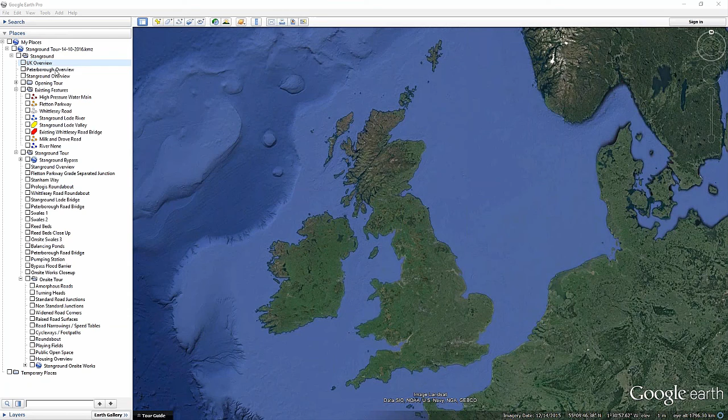So in this case study, we'll look at a new development on the southern edge of Peterborough. The city of Peterborough, with its historic cathedral at its centre, is situated roughly 75 miles north of London and benefits greatly from its direct transport links, the A1M motorway, the East Coast Main Line Railway, and the River Nene that runs through its centre. It may come as no surprise that it's an ever-expanding city.

So, as part of a major extension to the southern edge of Peterborough, south of Stanground, Wormald Burrows Partnership Ltd were engaged to undertake the civil engineering design for a proposed residential development of around 2,000 dwellings with new retail centre and public recreation ground. A major requirement of this extension was the provision of a new 3.2 kilometre bypass to link the south-eastern corner of Peterborough to the Fletton Parkway, a dual carriageway major distributor road that runs from Peterborough to the A1M.

This bypass was to have a dual purpose. Firstly, to create a transport link to reduce congestion on existing roads within the surrounding residential areas of South Peterborough and Stanground, and secondly, to provide an entrance to the new development.

So in this presentation, we shall talk about the following design challenges. Finding a route for the new bypass, taking into account the many site constraints, a new connection onto the Fletton Parkway, dualling the Stanham Way feeder road, the upgrade of the roundabout on the western end of the bypass, a new roundabout on Whittlesey Road at the eastern end of the bypass, the bridge over the Stanground Lode, an Environment Agency watercourse, and the bridge over the new bypass, an innovative SuDS drainage scheme with balancing ponds and reed beds, and the challenges within the housing development itself.

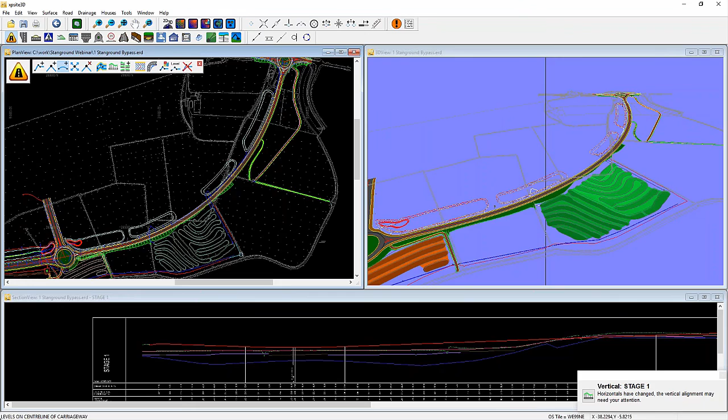Another engineering constraint was that the local water authority had recently laid a high-pressure water main running west to east across the site, which incidentally was not installed on its agreed alignment, the position of which was now very close to the southern edge of Wormald Burrows' preferred bypass route. Ideally, the bypass would be aligned close to the high-pressure water main to maximise the area of the site for the SuDS infrastructure, Peterborough Road Bridge, dwellings and employment development, but not so close as to jeopardise the integrity of the water main. Jeff, a few metres either way made all the difference?

Indeed, you can see here in XP Site 3D, we modelled the bypass route with interfacing, that is together with cuttings and embankments, to show the extents of where the bypass would have to be dug in so as to pass underneath the existing Peterborough Road, which was to bridge over the bypass.

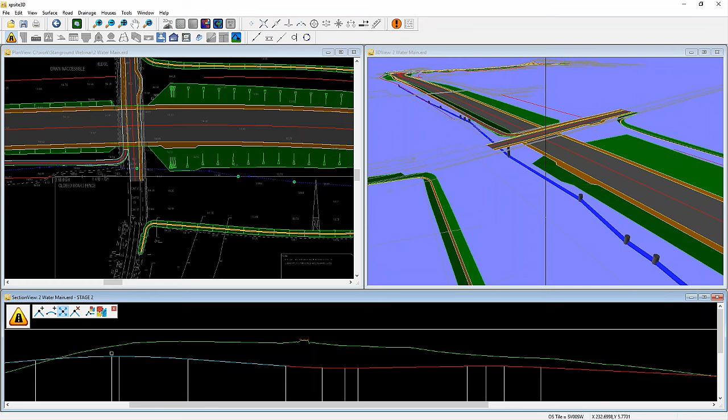Because the interfacing slopes are instantly updated with every adjustment of the road alignment, the proposed model could be visually checked against the surveyed position of the water main and adjusted to ensure there was sufficient clearance in the horizontal and vertical planes to leave the water main and thrust blocks undisturbed. This was an iterative design stage, but the speed and flexibility of XP Site 3D enabled this work to be completed very quickly.

The new bypass would link between the Fletton Parkway, a dual carriageway distributor road serving the south of Peterborough, to the existing Whittlesey Road on the opposite eastern side of the site. The bypass was envisaged to reduce the existing heavy traffic flows through Stanground. However, the existing grade-separated junction onto the Fletton Parkway would need extensive alterations, as it had not been designed to accommodate the increased level of traffic. Jeff, can you tell us how you achieved that?

Yes, indeed. The existing junction on the Fletton Parkway was of typical design and consisted of 4 slip roads peeling on and off the dual carriageway, connecting to the dumbbell twin roundabouts, one either side of the dual carriageway, with a single 2-way road passing beneath the dual carriageway and joining the 2 roundabouts.

Any modifications to this junction would be limited by the bridge, as it would be prohibitively expensive to alter the abutments. A second major limit was the path of the slip roads, these being constrained by the industrial estate buildings to the southwest and northwest, a pedestrian underpass on the western side, a large lake to the northeast, and the Stanground Lode Valley to the southeast.

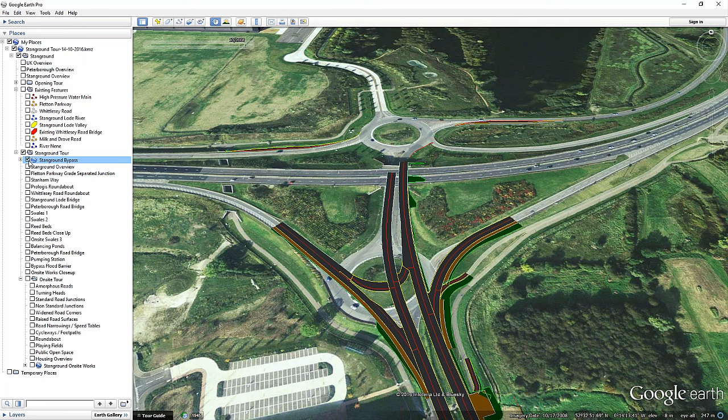To allow for increased traffic, which we wide area modelled from traffic counts, O&D surveys, and movement surveys of residents living on the existing development immediately to the north, our solution was to remove the existing southern roundabout, replacing it with dual carriageway, with signal-controlled junctions for the slip roads onto the Fletton Parkway. The principles employed in the design of the new junction layout were to replace points of conflict with merging movements, and thus substantially increase the capacity of the junction within the existing grade-separated structure.

The new dual carriageway linked through to another pre-existing roundabout 400 metres to the south. So as to reduce construction costs, the existing single carriageway, Stanham Way, was retained as the western side of the new dual carriageway southern link.

Modelling the eastern carriageway in XP Site 3D allowed us to minimise the extent to which this new link would encroach on the Stanground Lode Watercourse Valley and designated Newt and Reptile Reserve along its east flank, by careful attention to various interfacing options in the vicinity of the lode.

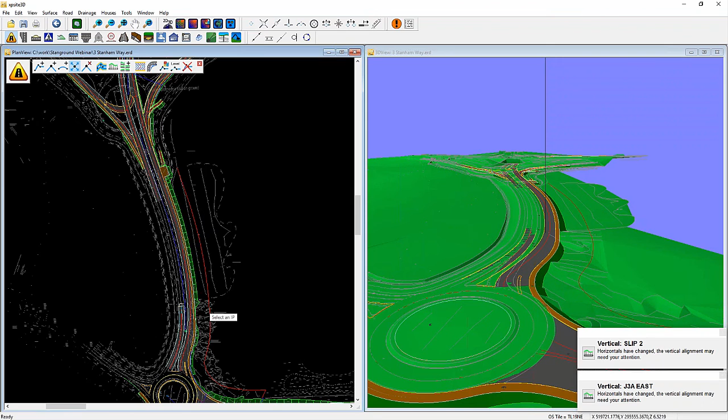As you can see here on the XP Site 3D model, as I move the horizontal alignment, everything on the design that is affected by the change is instantly regenerated to show the impact. The pre-existing roundabout at the southern end of this link, which served an existing industrial estate, would be where the western end of the new bypass would be joining.

The introduction of the bypass connection onto this existing roundabout junction would result in a very significant increase in traffic, and so the roundabout required extensive remodelling. Yes, we remodelled this roundabout in XP Site 3D to increase the capacity of the junction, as well as introducing dedicated lanes for existing traffic to travel to the expanding industrial estate and new traffic to peel off down the new bypass, without either flow impeding the other.

Provision was also factored into the design for a possible future Southern Link Road connection from this roundabout. Very severe constraints were imposed on the roundabout design by the presence of the Stanground Lode Valley, which contains an Environment Agency main river, great crested newts and reptiles, and various depths of peat. Once again, XP Site 3D really came into its own, as all changes to the interfacing, brought about by adjustments to the horizontal and vertical alignments of the roundabout and connecting carriageways, could be instantly viewed in true 3D.

The western end of the proposed bypass was connected to the existing roundabout using XP Site 3D's automated junction tools. We defined the existing edge of the roundabout from the 3D survey, then matched the western end of the new bypass to it. This process took only a matter of seconds to undertake in XP Site 3D, but would have taken far longer using traditional tools. XP Site 3D automatically defined the horizontal and vertical positions of every channel and curb line to smoothly transition from the bypass to the existing roundabout.

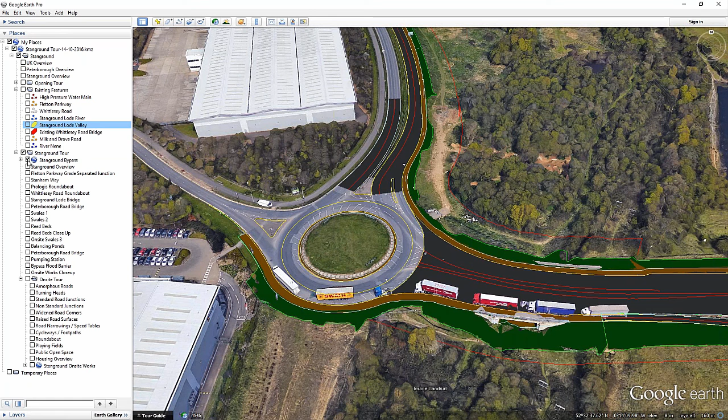And the other end of the new bypass, the eastern end, was to be connected to a roundabout junction onto Whittlesey Road. Wormald Burrows had a choice: to pull the route of the bypass slightly further north and connect to an existing roundabout, or break into an existing road with a new roundabout. Following detailed traffic analysis, the existing roundabout was deemed too small to cope with the increase in traffic flows and would have required extensive remodelling. It would also have meant the new bypass route would encroach into residential development land, effectively sterilising a significant area of the site.

Constructing a completely new roundabout in a more desirable location was the only viable solution, but would incur greater costs, which could be minimised by reducing the area of breakout on the existing road. Modelling a roundabout in XP Site 3D is very quick, and this speed allowed us to test multiple horizontal and vertical positions for the new roundabout in order to reduce the amount of work required on site, while still avoiding the many site constraints, principally the existing bridge, Milk and Water Drove Road, and the old course of the River Nene.

Once the horizontal position was chosen, using the 3D view in combination with the vertical road alignments allowed us to tweak the levels of the three incoming roads to the roundabout, two being the east and west arms of Whittlesey Road, and the one being the new bypass. As you can see here in XP Site 3D, the 3D view shows the existing survey surface at the same time as the proposed road surface.

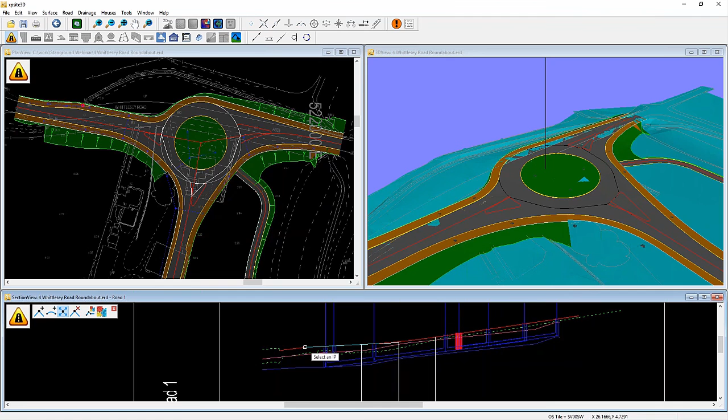The ability to immediately generate a roundabout design in full 3D that complies with all design standards, with even gully positions located correctly in accordance with the British standards and the DfT Roads and Bridges standards, underscores the step change between XP Site 3D and competing software. The difference is twofold. XP Site 3D has been designed from the outset such that every construction entity understands its relationship to other entities, which is the essence of BIM, Building Information Modelling.

And secondly, XP Site 3D has decades of design engineer intelligence built into the design processes. The result is a design that would previously take a day or two to complete can now be undertaken in seconds, in real time, with design standards met.

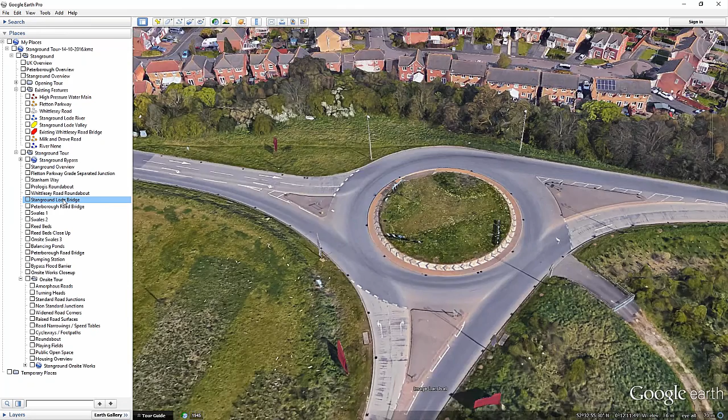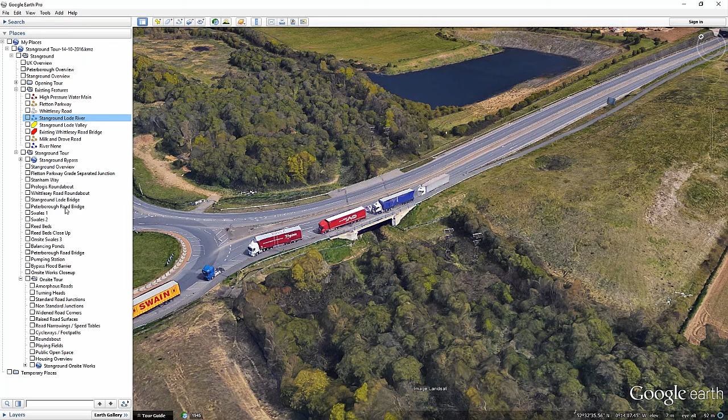So two new bridge structures were required. The first to enable the bypass to cross over the Stanground Lode watercourse, where the Environment Agency stipulated that animal movement should be accommodated throughout the length of the Stanground Lode. This necessitated the inclusion of a berm and greater dimension between abutments to provide free passage at top of bank, and a second bridge to allow the proposed bypass to pass beneath the existing Peterborough Road.

XP Site 3D was used to design the carriageway over the Stanground Lode bridge, and from this design a general arrangement drawing was prepared and passed to the structural engineers for the structural detail. Similarly, a new bridge was required where the bypass crossed beneath Peterborough Road, where the same process was repeated, with the bridge structure being modelled in part using XP Site 3D. The interfacing tool was used to outline the bridge structure and void beneath in 3 dimensions.

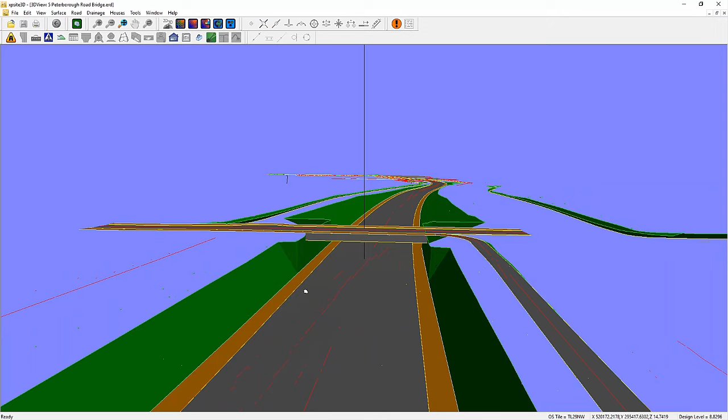One great advantage of XP Site 3D is its ability to model in true 3 dimensions, where one road, in this case Peterborough Road, crosses over another, that is, the bypass, allowing the engineer to accurately create vertical alignments for both roads whilst maintaining the required vertical gap between the two.

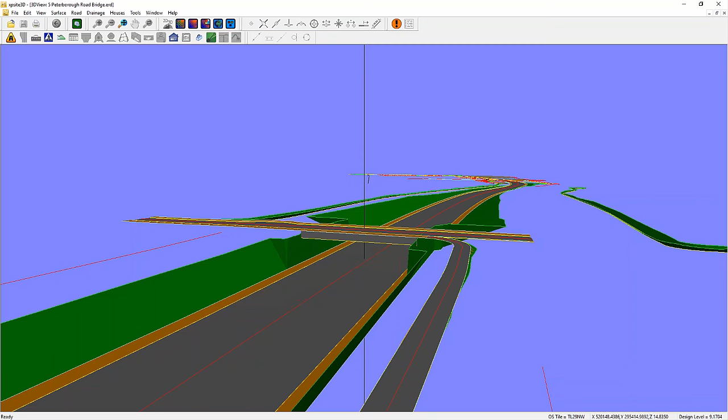It was also at this point that the bridge severed two large diameter foul trunk sewers that drained the settlements to the south of Peterborough. Modelling of the foul water drainage solution was undertaken in MicroDrainage using the direct link between XP Site 3D and MicroDrainage. The Drainage Authority, the Middle Level Commissioners, stipulated that the on-site stormwater drainage scheme at Stanground maintained high standards in water quality and efficiency.

As the old River Nene was pumped, the Middle Level Commissioners required a £56,000 surcharge per impermeable hectare of development, which for 40 impermeable hectares of development amounted to £2.24 million. It was agreed with the Middle Level Commissioners that if a scheme could be designed to at least replicate, if not improve upon, the runoff regime of the agricultural land, that the £2.24 million surcharge would be waived, but that the design had to fulfil criteria for stormwater outflow to replicate the greenfield runoff in terms of time of concentration, quantity and quality.

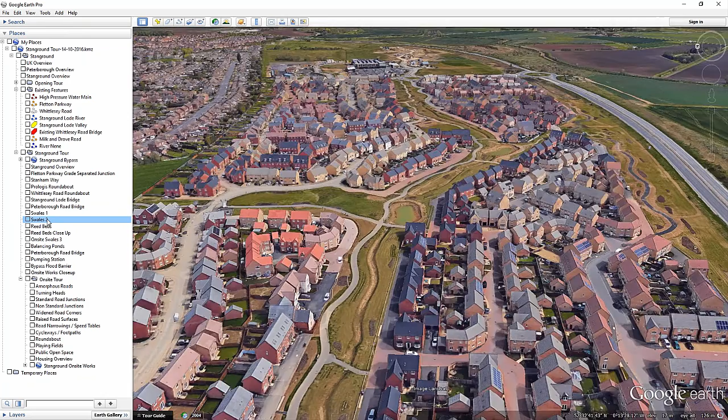To achieve this, Wormald Burrows Partnership devised an innovative SUDS scheme, making use of the grassy public open spaces between the houses and the noise abatement land strip alongside the new bypass, whilst simultaneously improving the aesthetics of the residential development. Jeff, could you describe how Wormald Burrows achieved this?

Well, as part of an agreement with the Water Authority, we had to ensure the stormwater runoff from both the residential development and the bypass had to pass a certain quality standard. To reach this standard, the water would have to pass through some sort of water treatment system to remove pollutants and impurities, to ensure that it would be safe before discharging into the river network.

It was imperative that a low-velocity attenuated flow was fed through the reed beds to ensure efficient filtration before the water outflows to the River Nene, and this was achieved by using a series of ponds located between the bypass and the development. We designed the reed beds in XP Site 3D by modelling a series of shallow, fairly wide earthworks aligned along the existing ground contours with raised ground in between to enable future maintenance, and this produced a combined flow distance of about 1 kilometre within a relatively small area of land.

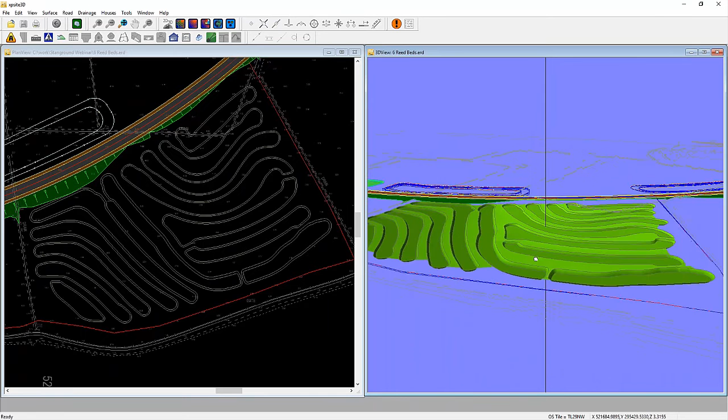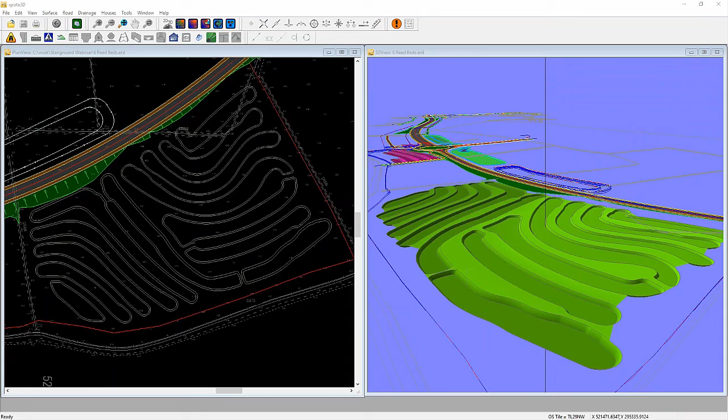The replacement of sterile agricultural land with reed beds provides significant environmental and wildlife habitat benefits. An additional aesthetic benefit by designing the reed beds aligned to the existing ground contours is that when viewed from eye level, it appears as a single large bed of reeds, which adds to the visual appeal when travelling along the bypass and at the entrance to the new development.

And the on-site swale networks between the new housing have been designed to not only attenuate the flow, but also to act as a water treatment system, whilst the water has been directed away from the properties towards the balancing ponds.

These balancing ponds then attenuate the flow by limiting the outflow to the reed beds, and hence to the River Nene, and providing sufficient storage for the critical storm.

We used XP Site 3D to design the swales and piped stormwater system into the 3D model, which could then be easily exported into MicroDrainage to run the drainage simulations. The results from the MicroDrainage simulations were then fed back and used to determine the critical storm event, which then informed the engineer the volume of storage that would be required in each of the balancing ponds.

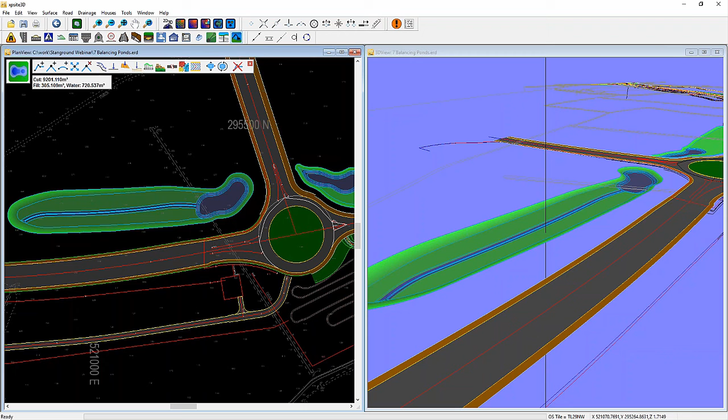There was a further benefit arising from the method of treatment of the stormwater discharge. Under the Code for Sustainable Homes in force at the time, the Stanground development gained extra credits as it fulfilled the criteria which specified that a typical 5mm rainfall event would provide no additional flow off-site. The long swales and balancing ponds throughout the residential development, in combination with the reed beds, allows the 5mm storm event to soak away, be absorbed, and naturally evaporate, and so never actually reach the River Nene outflows.

As mentioned earlier, construction of the bridge that carries Peterborough Road over the bypass caused 2 foul trunk sewers to be severed. Because of foul water surcharge problems downstream, it was necessary to introduce buffer storage. Additionally, the Water Authority required that each of the trunk foul sewers downstream of the bridge should take similar flows as were being delivered before they were severed. How did you address this challenge, Jeff?

Well, there was a proposal by another consultant that the only means of meeting those criteria was by constructing 3 pumping stations, 1 for each of the trunk sewers and 1 for the foul water drainage arising from the new development. Each of the pumping stations was to have consisted of 3 chambers, each of 4 meters diameter and 8 meters deep, in order to provide buffer storage, constructed within well over 12 meters depth of peat in that particular area. For obvious reasons, that consultant was having great problems in convincing the Water Authority that the scheme was viable and that the Water Authority should adopt the 3 pumping stations when completed.

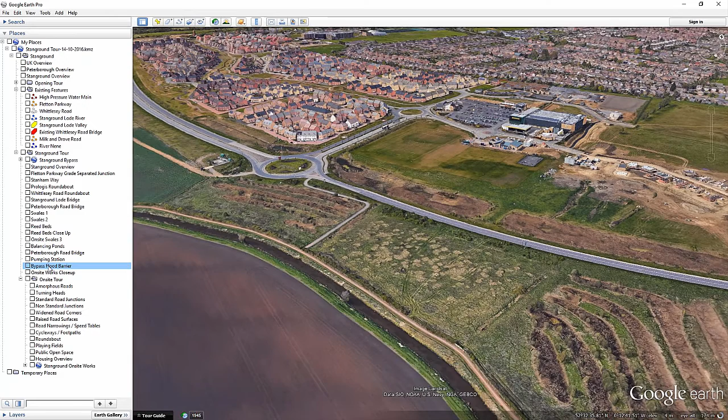Modifying the vertical alignment of the road is very quick in XP Site 3D and automatically recalculates any and all features that are dependent upon it. The real-time adjustment of horizontal and vertical alignments is a powerful tool for the design engineer. It saves time and removes the possibility of human error.

The interfacing and contouring remain up to date and instantly show when the design has achieved the desired level to avoid on-site flooding. Thus, under any flood conditions, the on-site flood routing ensured that, if the drainage systems were overwhelmed, all properties would remain above flood water flows.

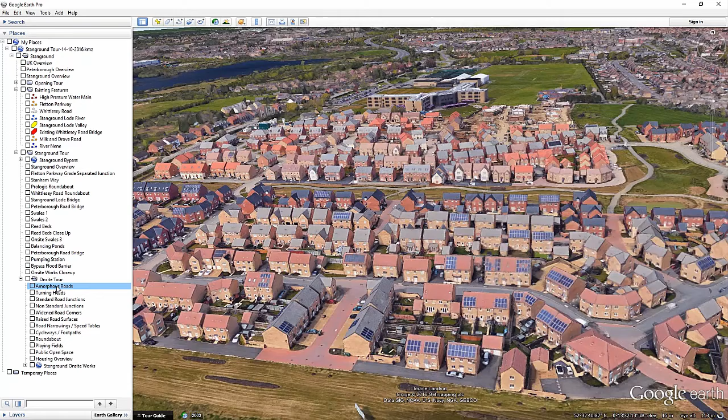Let's take a look at the residential development of the site. A quick review of the on-site design shows the numerous quirks and challenges of the architect's road layout, all of which have presented no problem for the engineers to design speedily and accurately using XP Site 3D. Here we can see amorphous shaped roads where the left and right channels are anything but parallel or straight, turning heads of various individual designs,

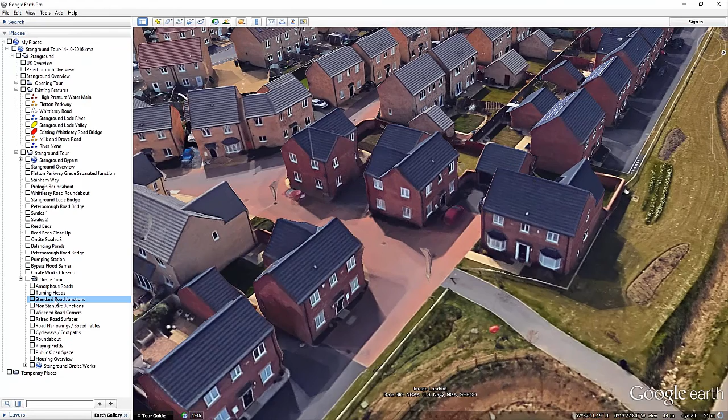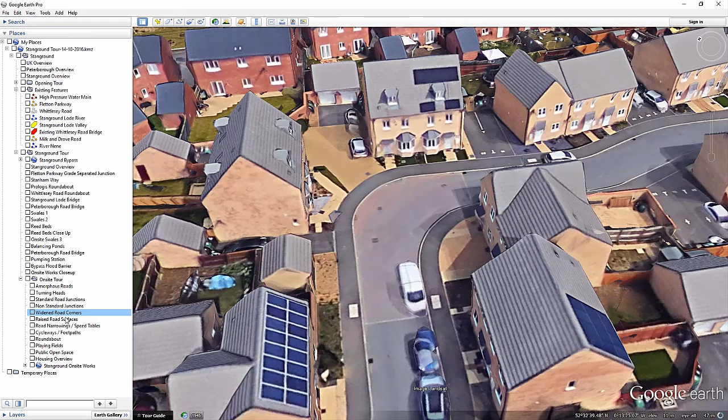numerous standard road junctions, non-standard road junctions of various shapes, widened road bends to allow larger vehicles to negotiate the bend, raised road surfaces to provide a shared surface for vehicles and pedestrians, road narrowings for traffic calming,

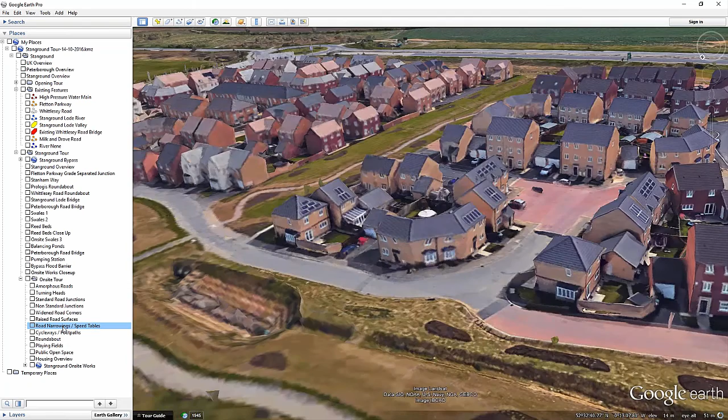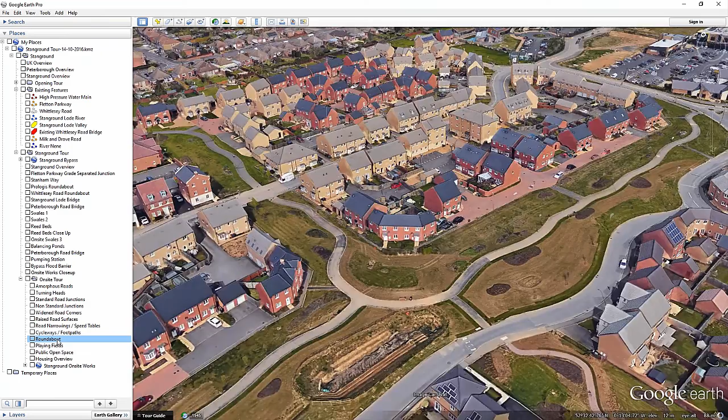cycleways and footpaths, roundabouts, playing fields, and public open spaces.

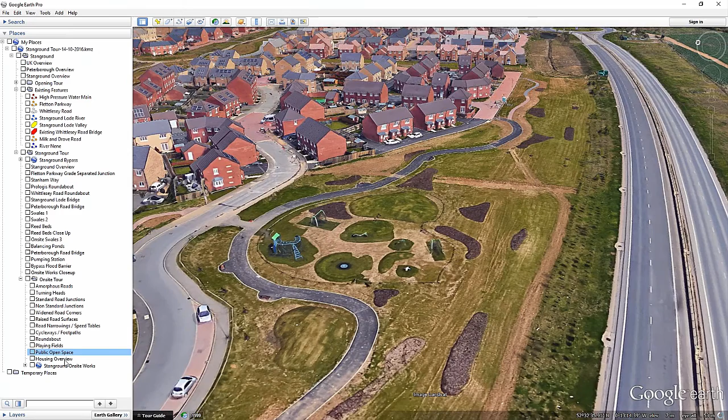It is interesting to see just how accurately the built site matches with the 3D design produced from XP Site 3D. The files can be output in a form to be used by the surveyor or contractor for direct input into their instruments or plant. In the early days of the Stanground project, this was in fact the first job where the surveyors requested setting out data in digital form to load directly into their instruments, though this is now a common request.

Another great advantage of XP Site 3D is that it is intuitive in operation. A number of our engineers have picked up the program with little or no training and, within a day or two, have been a reasonably proficient and productive user. From the employer's point of view, I find that engineers are more content when using XP Site 3D, not only gaining satisfaction from the amount of work that they can produce, but knowing that the final result is fairly well honed and a better job all round.

Finally, we should quickly talk about BIM, Building Information Modelling, which has become a hot topic in recent years. And if you're working with a UK government body, it is becoming mandatory to be BIM compliant. When development of XP Site 3D was started from scratch around 12 years ago, what is now called BIM was preempted by designing the software around the principles of intelligent objects.

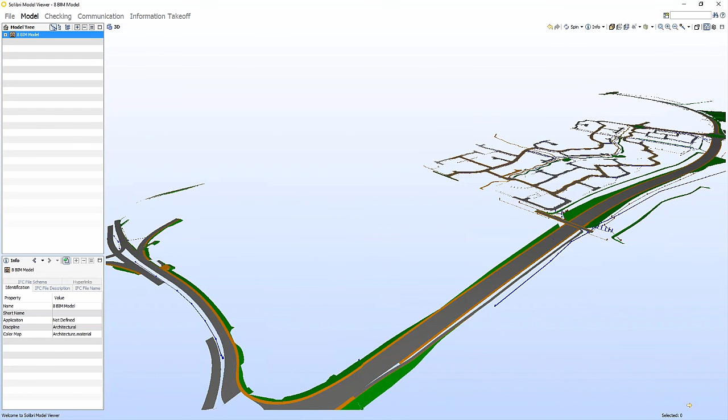So you can export your design in BIM format to be included in the BIM model. For example, commonly Navisworks may be used to collate the BIM model for the extended project. Here we have the Peterborough site in BIM model format viewed in the Solibri viewer. You can see that the BIM model contains everything from the XP Site 3D design and looks identical.

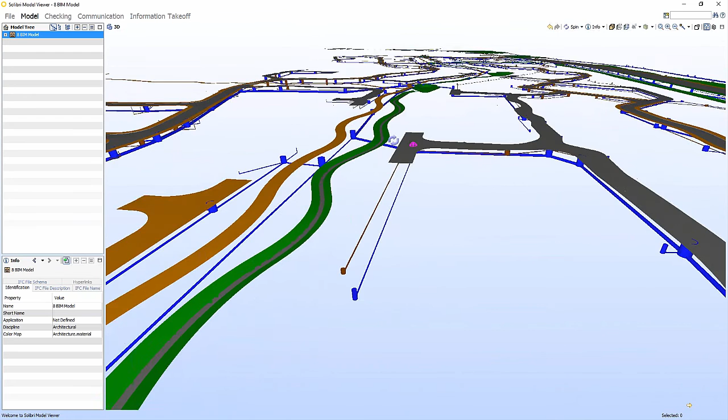What a fantastic live demonstration of not only great software, but more importantly, great engineering. And that's really what it's all about. It's the reason most of us are here today, to solve problems and to create elegant and novel solutions for real-world challenges that will improve the livelihoods for us all.